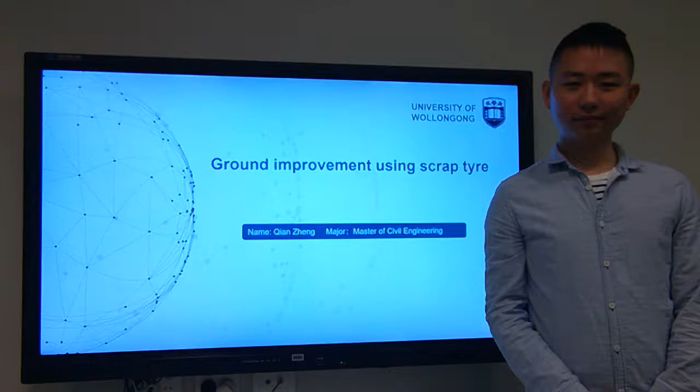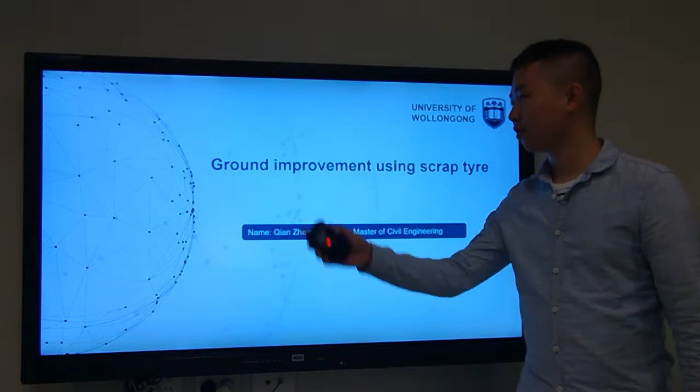Today, I'm going to talk about ground improvement using scrap tire. There are five parts, and the first part I will talk about is the research significance. Next is previous research and research question. Then I'm going to talk about research design, and finally I will talk about design evaluation.

By recycling and reusing scrap tire in civil engineering, we can save a large amount of resources. Hence, this is an effective way to promote economic development if appropriate measures have been taken. Every year, a part of scrap tire is recycled for reuse in civil engineering, which is environmentally friendly for sustainable development.

Tire can pose a risk to human health through air and soil pollution. Therefore, application of tire in civil engineering can protect human health by reducing the number of tires discarded. And for the final part, the main purpose is that application of tire in engineering can improve ground performance.

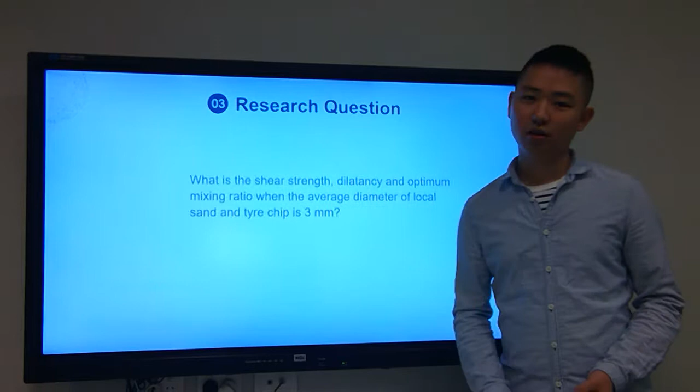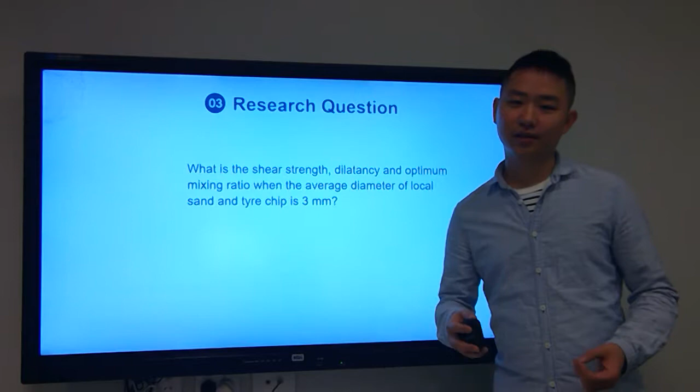For the research question, I analyzed that the same average diameter of sand and tire should be investigated. Hence, the research question is, what is the shear strength, dilatancy and optimum mixing ratio when the average diameter of local sand and the tire chip is 3 mm?

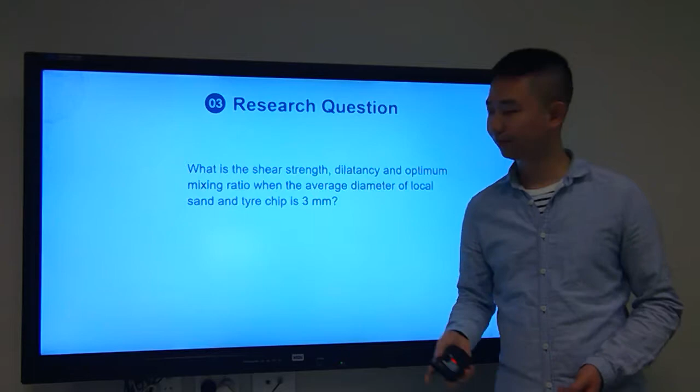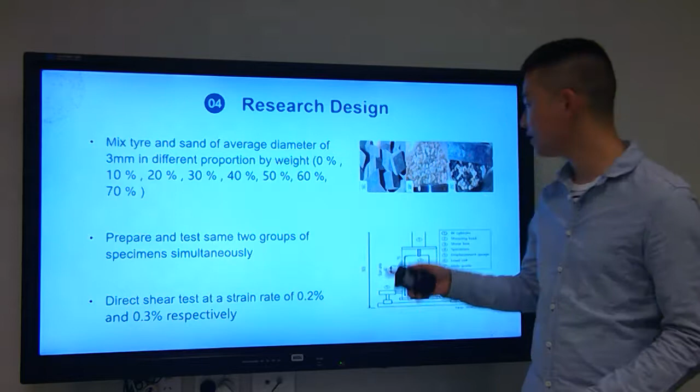In the preparation of experimental specimens, mixing tire and sand of average 3 mm size in different proportions by weight, tire content of 0%, 10%, 20% to 70%, the sand tire mixture was prepared. The sand and the tire used in the experiments are shown in the slides here.

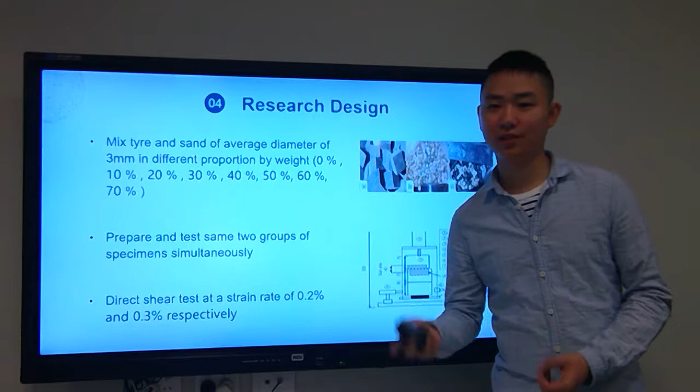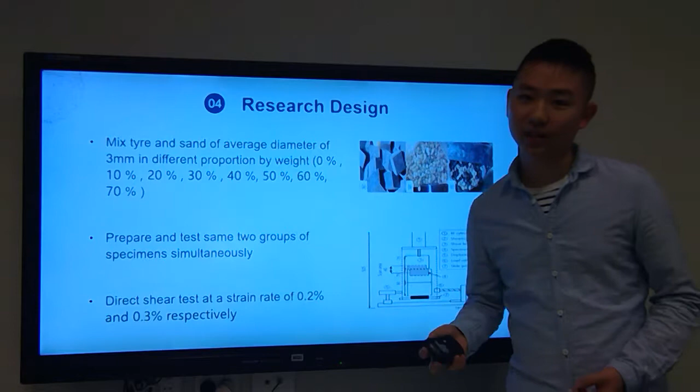And prepare the same two groups of specimens and the apparatus. And the apparatus is shown here. These two groups have been carried out simultaneously, at a strain rate of 0.2 and 0.3% respectively.

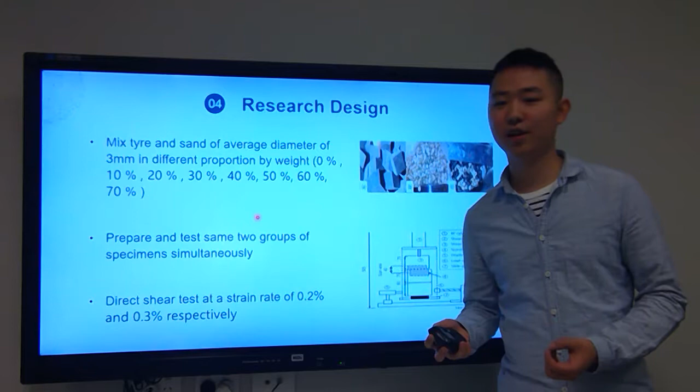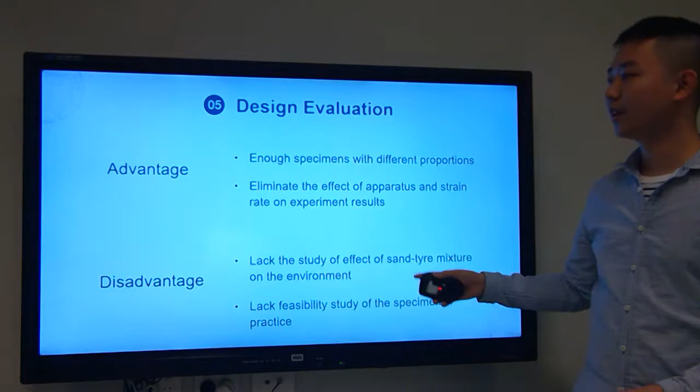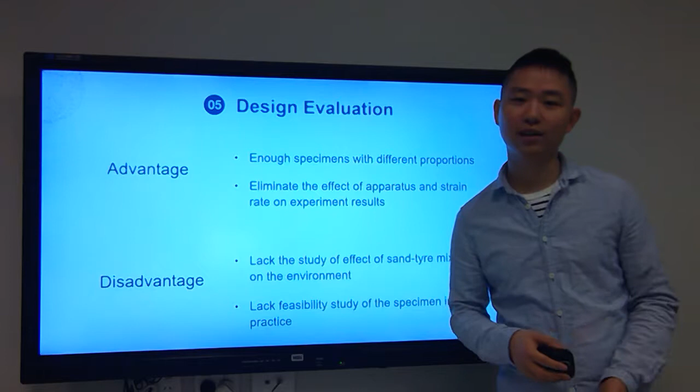In this slide, I will summarize the advantage and disadvantage of the tire sand mixture design. The advantage of the design is that enough specimens of different proportions have been used in the study, which contributed to investigating the optimum mixing ratio and identifying the change in shear stress and dilatancy by drawing the experiment results into line chart. Also, apparatus and strain rate during shearing can lead to discrepancy of the results, and it's an effective way to take two apparatus and strain rates in the experiments.

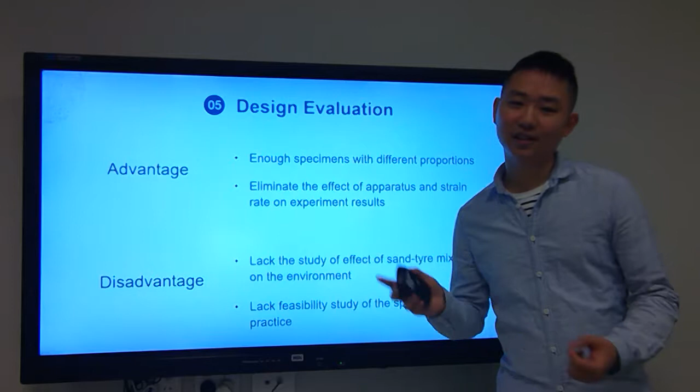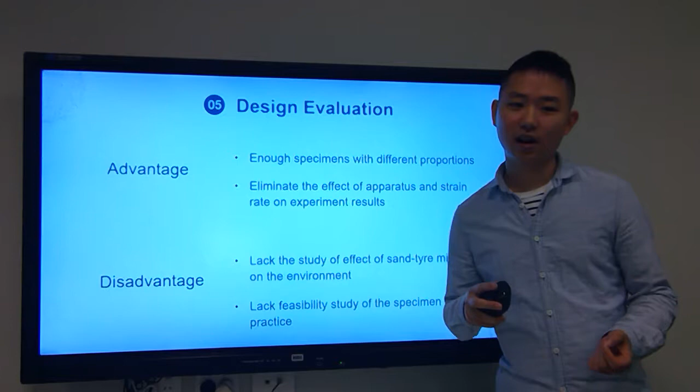Nevertheless, this design didn't include studying the effect of sand tire mixture on the environment, whether the environment problem becomes serious because of sand tire mixture, whether it can reduce the cost and have a positive effect on the economy. The feasibility study of sand tire in practice should also be conducted. Thanks for watching.